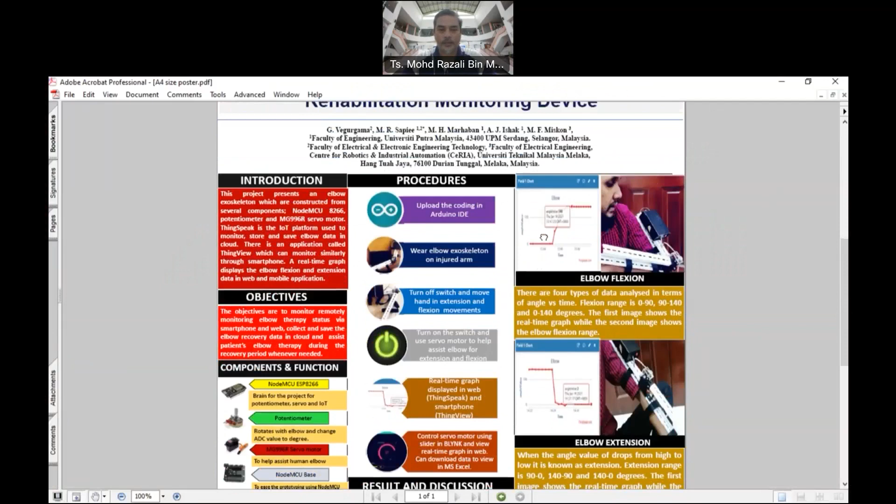The title for our project is the development of an IoT-based exoskeleton for elbow rehabilitation monitoring device. We will briefly go through whatever appears on this poster.

In the introduction, this project presents an elbow exoskeleton. We are constructing an elbow exoskeleton that will be attached to our elbow, and it can detect the movement of the elbow either in flexion or extension direction. It also has a servo motor which can help the elbow to move or lift up.

We use components like the Node MCU, a potentiometer in order to collect data, and a servo motor. This microprocessor is also connected to Wi-Fi, so it can communicate or transmit the data collected to the cloud.

In terms of cloud, we use an IoT platform. We use ThingSpeak, one of the IoT platforms currently available in the market. However, we can also use other types of IoT platform; just for this project, we use ThingSpeak.

Together with ThingSpeak, we can view the result on the web, and we can also view the result using the smartphone.

The objective is mainly to monitor remotely the elbow therapy status via web and also via smartphone. We collect the data and save it in the cloud so that later on we can use the data for reference.

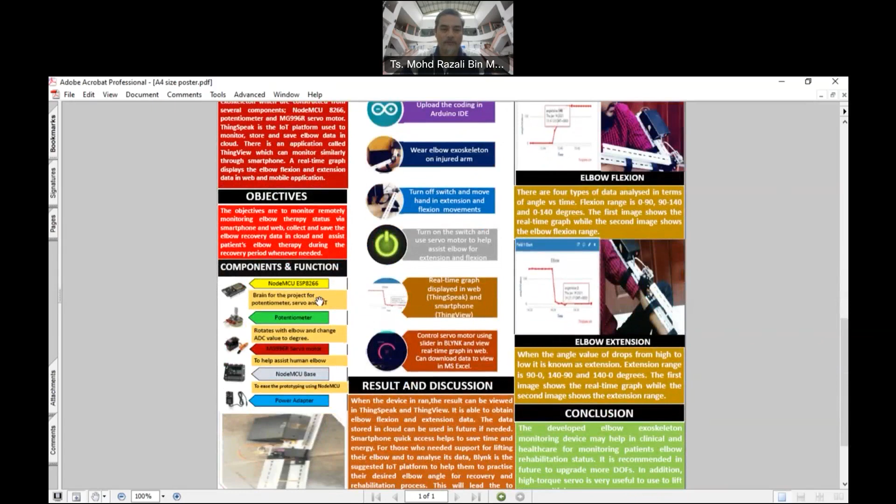These are some of the components: we have the Node MCU, the potentiometer mentioned just now, the servo motor, and this is the power adapter. We use the power adapter in order to power up this exoskeleton.

We have this structure, and the structure is for a person's arm. It can be used to monitor an injured arm of our patient, so we can monitor the recovery status.

We can get the data on whether the person can stretch out his arm in full extension, and whether the person can also pull in his arm in flexion, like a normal person. If the movement is not similar to a normal person's, we know the recovery is not quite enough.

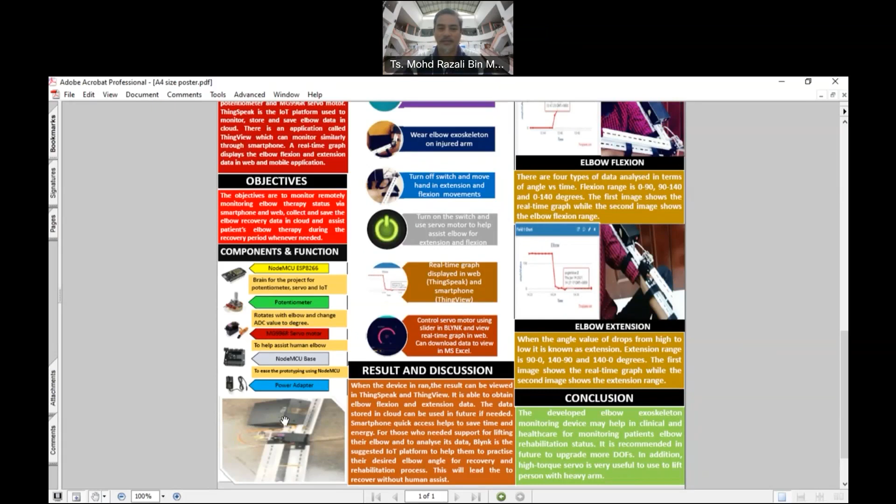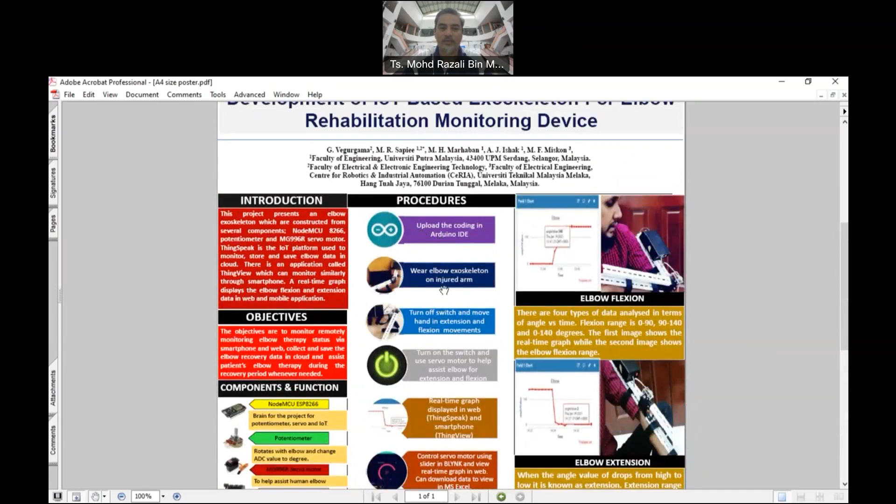The procedure is first we need to upload the program. We use Arduino together with the Node MCU. Next, we wear the elbow exoskeleton and turn on the switch.

Once the switch is on, it will start to collect the data once the movement is detected, and we can see the real-time movement on the web using a PC or laptop, and also using a smartphone. We have an application that we call ThingView.

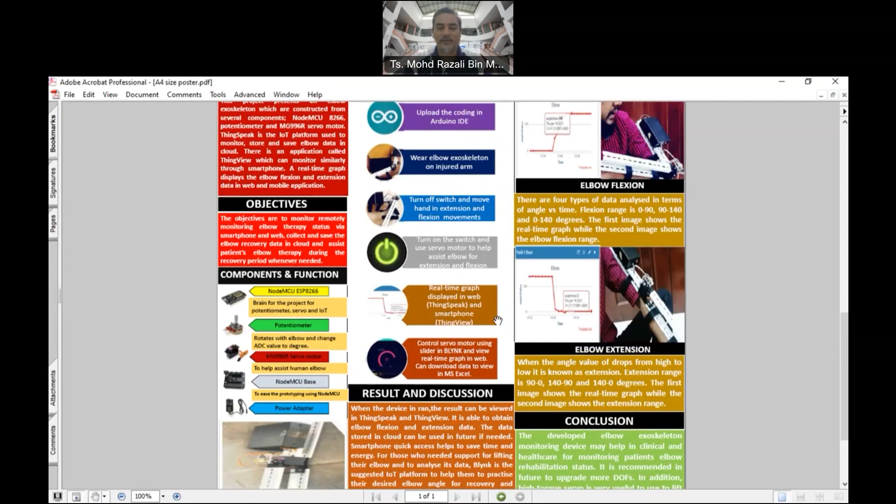Similarly, we can view it on smartphone, and the same appears on the web. We can also use it to control the servo motor, and we can observe the real-time change in the graph.

Results and discussion: this has been tested and it can collect the data. It can send the data to the cloud.

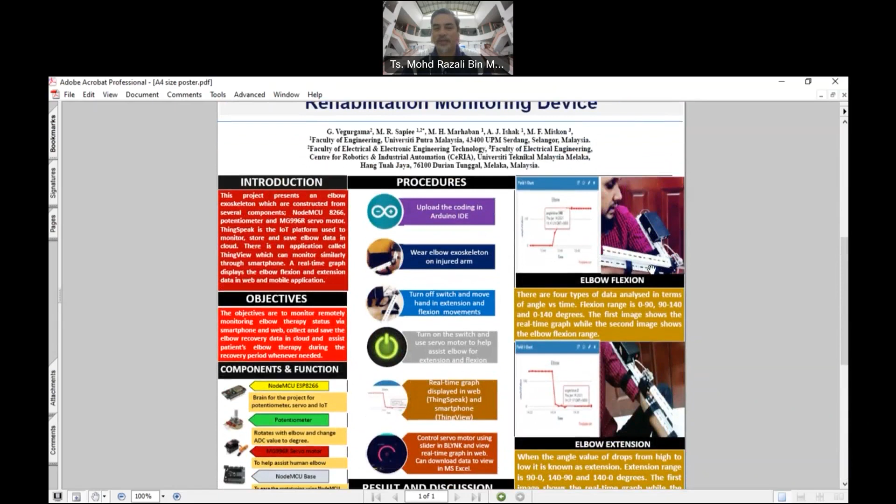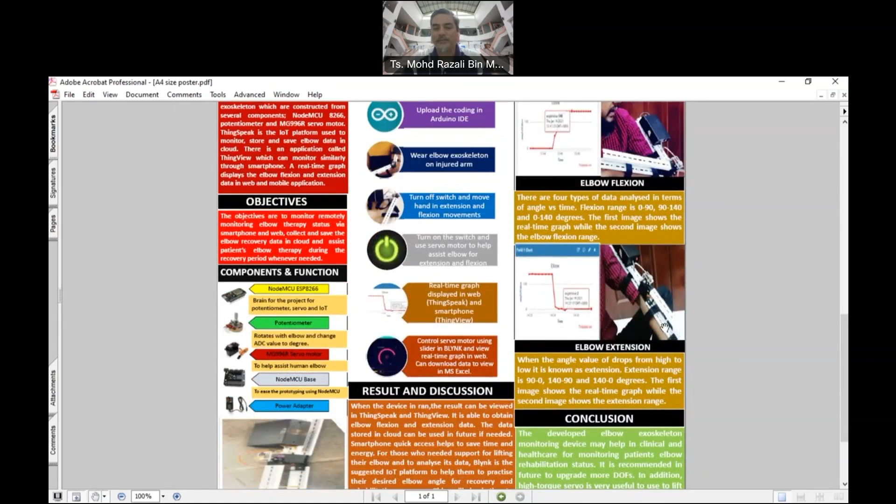Here are the illustrations; this looks like the graph. This is how we bend the exoskeleton for the elbow extension. This is the graph, and when we fully extend, we can see it is in one line. So any person with an injured elbow cannot really stretch out the arm in a straight line.

In conclusion, the elbow exoskeleton monitoring device may help in clinical and healthcare settings for monitoring patients' elbow rehabilitation status.

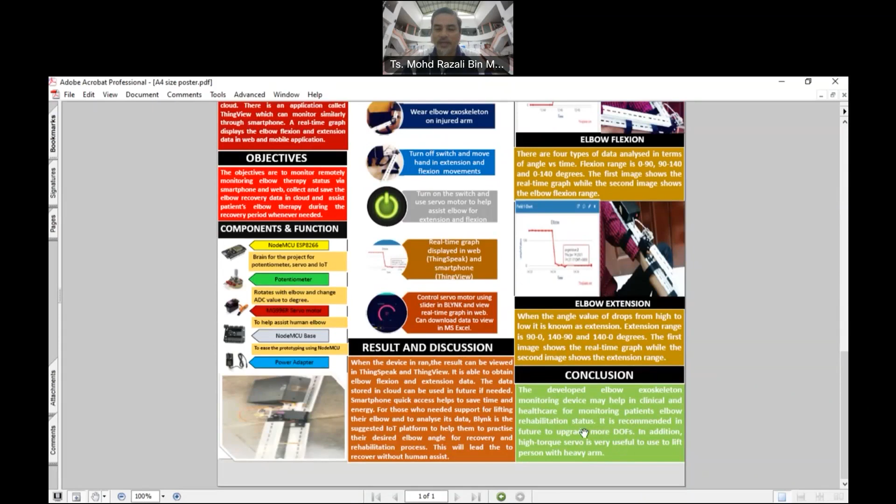It is recommended that in future we can upgrade the device to cater for more degrees of freedom. The one we developed caters for only 1 degree of freedom. In addition, we can use the servo motor so this device can be used on a person with a heavy arm. That's all for me.